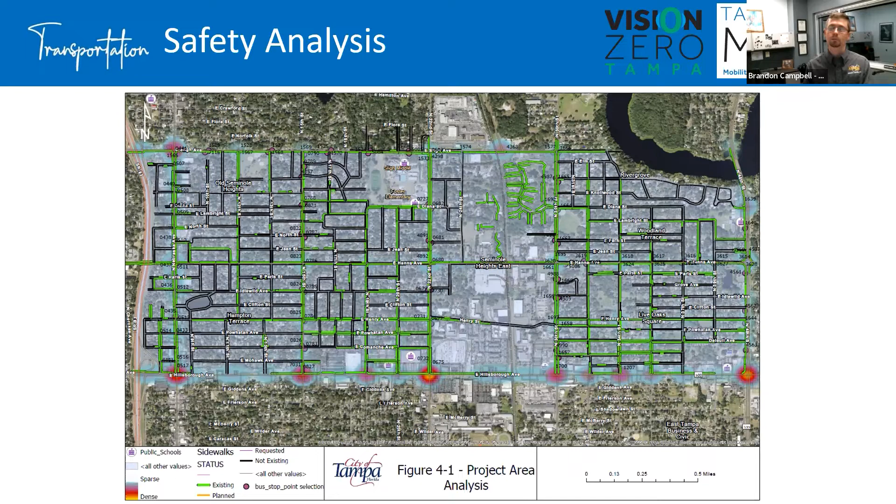You can also see on this slide an overlay of the sidewalk network. Everything that's green includes a sidewalk; everything that's black or gray does not. Part of the analysis process was to look and prioritize where we should fill in some of those gaps. There are a lot of gaps, and we have limited funding to address them, so we really need to figure out what the highest priorities should be.

Within that crash analysis, it's pretty typical for us to look at 5 years of crash data to categorize those by crash type and contributing circumstances. If there's some sort of identified pattern, then the recommendation is to take a step back and ask what this pattern can be attributed to.

Another step beyond the typical approach was that we included a road safety audit, which includes a multidisciplinary professional team that goes out and takes a look at the area, at the roadway with their own eyes, because sometimes the data-driven approach of just looking at where crashes have happened doesn't identify some of the potential hazards that we can see just by being out there on site.

As a result of the safety analysis, there were some recommended improvements to changing the geometry of crosswalks and curb radii, especially particularly on Hanna. Some multimodal accommodation, again centered as much on Hanna as anything. Some lighting improvements and some drainage improvements.

Those drainage improvements were identified partly as a result of just some observations with the road safety audit, and partly as a response to some of the wet condition crashes that we're seeing.

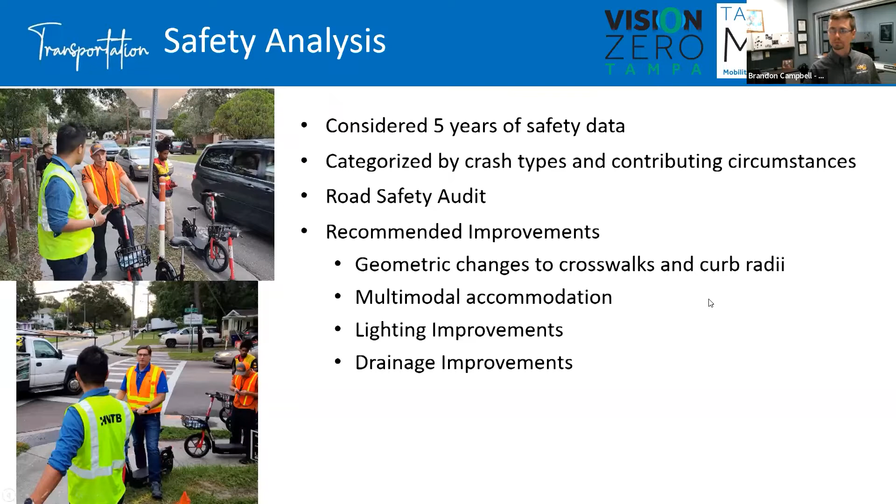The next step was the traffic calming analysis. I mentioned earlier that there were a couple of corridors that were spotlighted based on the community feedback we got, so we looked at traffic calming opportunities and possibilities, specifically looking at Hanna between 15th and 40th, looking at 24th Street between Hanna and Sligh, and looking at 23rd Street between Hanna and Idlewild.

So the recommendations based on the traffic calming analysis were, again, also related to the safety analysis from before: geometric modifications on Hanna, some speed feedback signs on both Hanna and 24th Street, and then eventually the possible addition of a sidewalk on 24th Street.

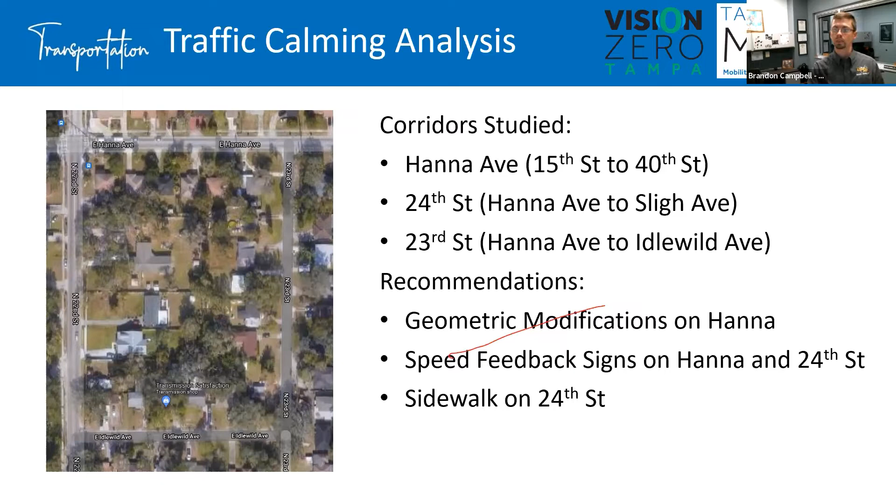If you're familiar with the corridor, it's pretty tight right of way, and there are some real design challenges to that, but taking a closer look and evaluating the possibility of putting a sidewalk on that street is one of the traffic calming strategies that we have been asked to consider.

And then last, the travel demand management. Again, we mentioned some of these things we anticipate doing, but did not want to incorporate them into the impact analyses because we wanted to take a conservative approach, and we don't want to take for granted something that is still a possibility or doesn't have a clear method of implementation just yet, but that we are pursuing.

So that includes coordinating with HART for transit access on Hanna. I know this is a topic that came up in previous community engagement, and for context, if you haven't been part of those conversations, there was previously a bus route that went on Hannah in front of the site. It was removed as part of their route reprioritization or route reduction for funding reasons.

We do not have direct control over HART's routing, but we do have a good relationship with them, and will continue to engage with them for possibly including a route that goes directly to the city center. But there are routes currently that go north-south on either side, on both 22nd and on 30th.

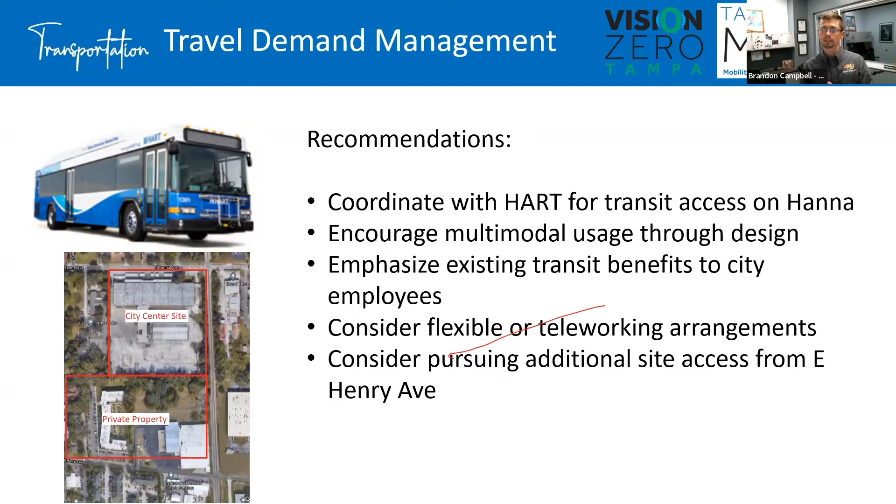So we were not comfortable committing to getting that done, again, as part of being conservative in our approach. It's not off the table by any means, but because we don't have direct site control, that might be a longer term process. And if the private property owners are not in favor of it, then obviously that is an obstacle to us.

So putting all this together, the recommendations that HNTB gave us were organized into near-term, intermediate-term, and long-term recommendations. There are timeframes on these: near-term is within 2 years, intermediate-term is within 5 years, long-term is beyond 5 years. I want to be clear that those timeframes are not commitments for us to do these things within these timeframes, but they're benchmarks for us to look at as we prioritize. Cal's going to get a little bit more into that when I turn it over to him.

That said, near-term recommendations include the potential signalization at Sligh and 30th. I mentioned earlier that it has a failing level of service with or without the development. We will need to take a step between now and the possible signalization to do a signal warrant analysis, just to make sure that it's the right solution for the right intersection. But it did seem to make a difference in the model.

School area improvements, including various signing and pavement marking modifications — I'll get into a little bit more of the specifics on that. Speed feedback signs on Diana Street, Hanna Avenue, and 24th Street — I mentioned a couple of those. Diana Street was part of the school recommendations, and then multimodal coordination with HART.

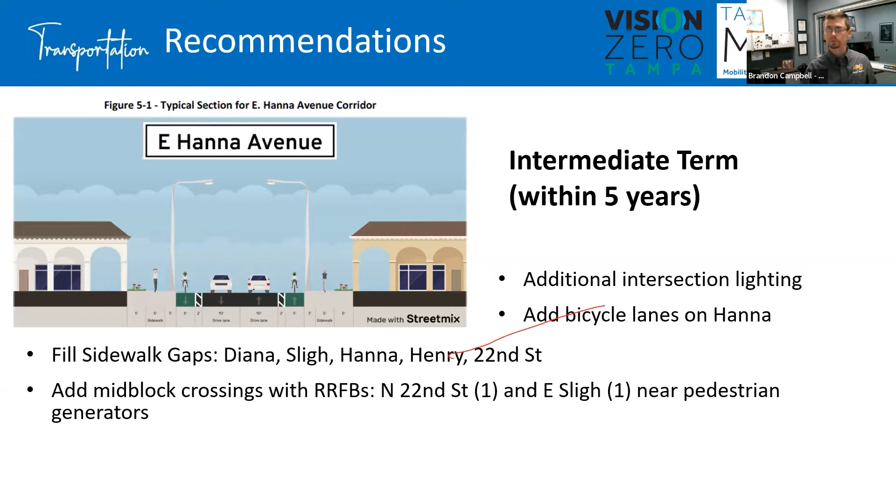I included this really as a reference point because we've had some feedback about what the cross-section of Hanna should look like and whether it should be expanded. There are several corridors across the city where we've taken a look at the cross sections that have in years past been expanded, specifically 4-lane sections, and really questioned, is this the right approach? We looked at the possibility of doing a road diet or a complete streets project to reduce that to 2 lanes, with either a continuous 2-way left turn lane or intermediate left turn lanes as needed.

We look at a lot of different guidance from different sources, one of which is the National Association of City Transportation Officials. I took a snippet from one of their complete streets guidance documents, just as a reference point, to say that's the sort of cross section we anticipate working for roads that are up to around 20 to even 25,000 ADT, which is average daily traffic. For comparison's sake, the current ADT on Hanna is between 6 and 8,000, depending on which block you're looking at. So we think that with the addition of a left turn lane into the site, maintaining 2 through lanes, 1 in each direction, is the right cross section for that facility.

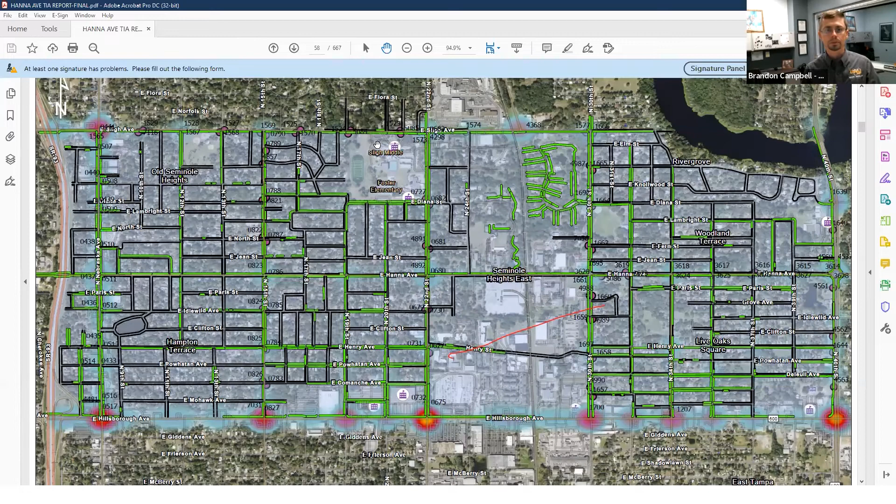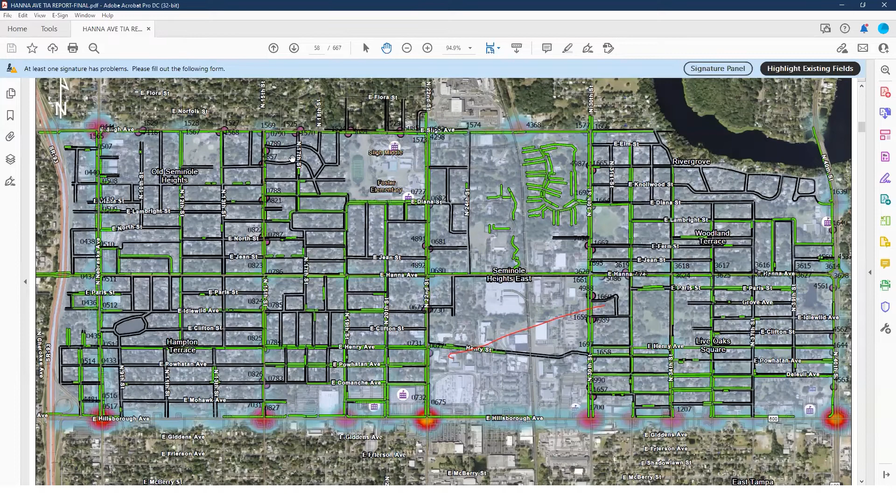The next question is from Robert Gatson of Seminole Heights East: did this study take into account that there is a 100+ unit apartment complex being built on 24th Street between Sligh and Hanna that will also be adding hundreds more daily trips to the immediate area? Looking at 24th Street between Sligh and Hanna, this area right here. Correct.

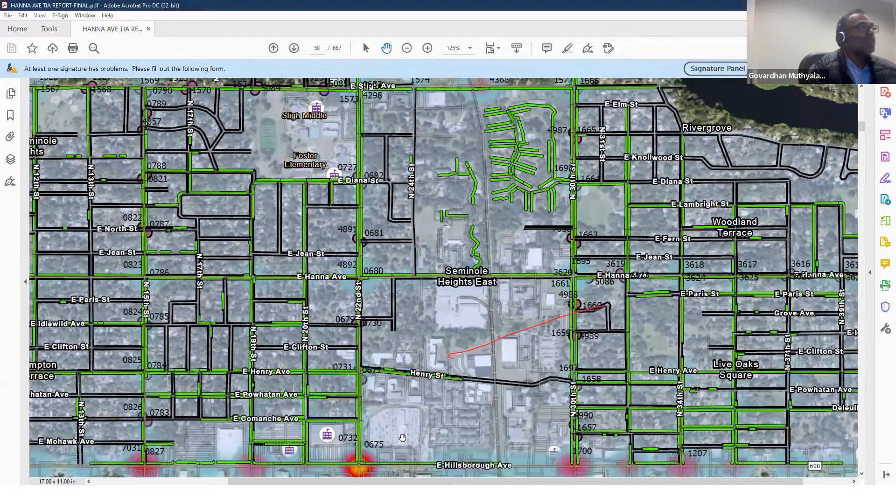Govardhan, was that identified? No, that wasn't specifically identified as part of the study. We incorporated the study from Hillsborough that we have information on, but what we did was, as part of the timeframes specified, Brandon, from 23 to 28 to 33 to 2033, we incorporated the growth rate as part of the study area. So part of it could be captured in that, but specifically the 100+ units has not been incorporated in the study—we did not have that information at the time of the study.

I have another question here. This comes from Miss Gadsden, and she has 3 questions, but the first one is most relevant to what we're talking about here. Let me rephrase this question.

Basically, what she wants to know is about the impacts along 34th Street and Hanna. There's a lot of traffic along those streets, and also a bottleneck of cars on 40th Street that sometimes intersects with traffic on Hanna and 34th Street. Can you talk about that?

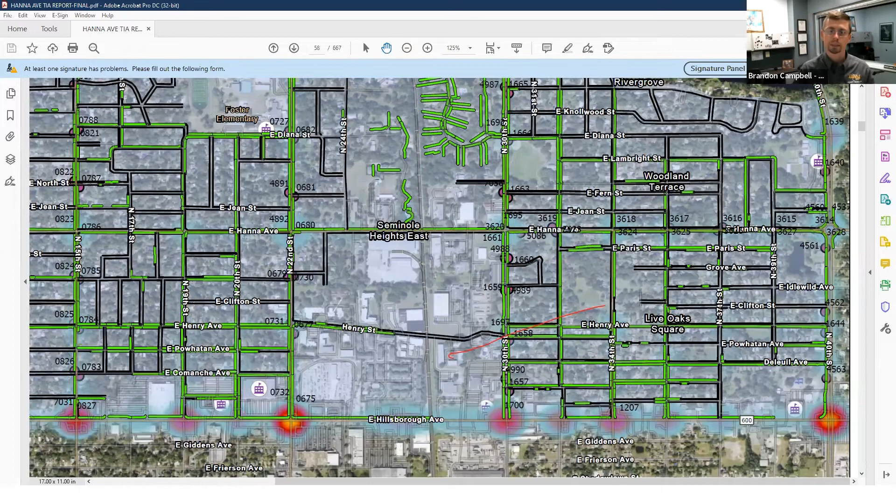So the assumptions about routing to the site in the AM peak centered more around, at least from Hillsborough, coming up 40th and taking the roundabout to go into Hanna, or coming up 30th and taking a left onto Hanna. Not so much on 34th. Let me see if I could pull that up.

Brandon, she's also very interested in the crash data as it relates to those streets, 34th Street in particular. Got it, the crash data is contained in Appendix F. Let me pull that up real quick. I know where that is.

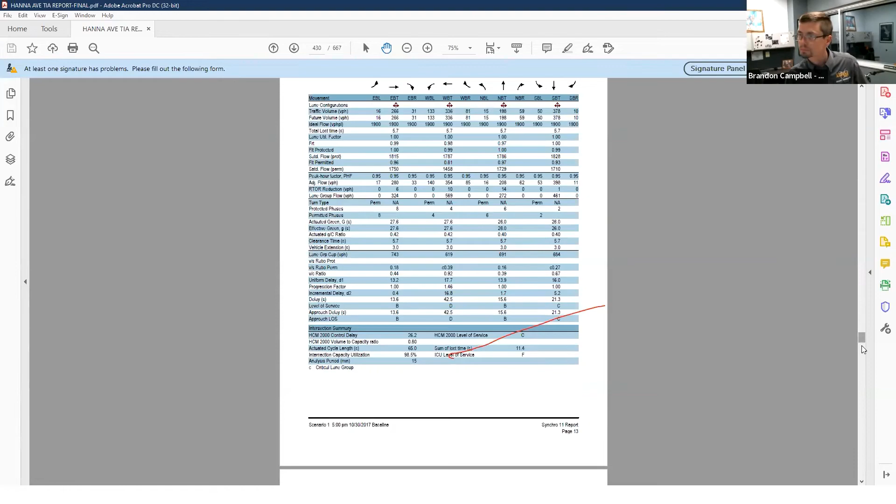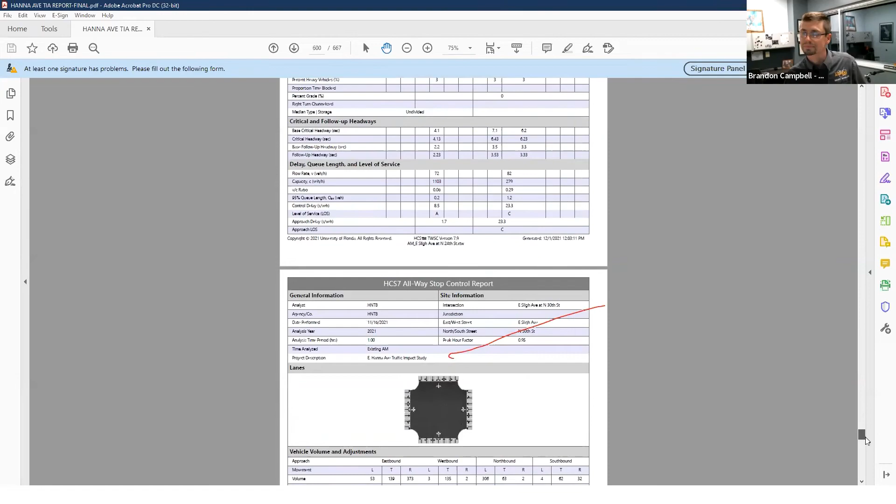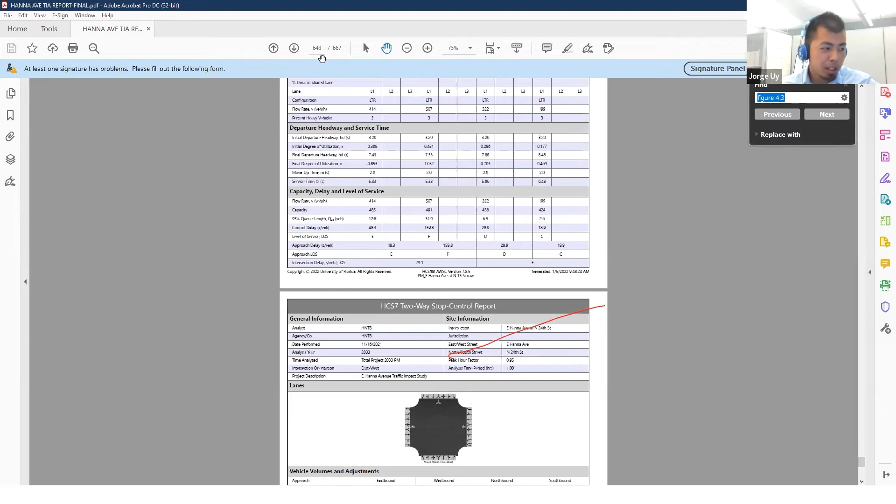Scrolling may not have been the best method. Sorry. Hey Brandon, it's PDF page 286. Thank you, appreciate that.

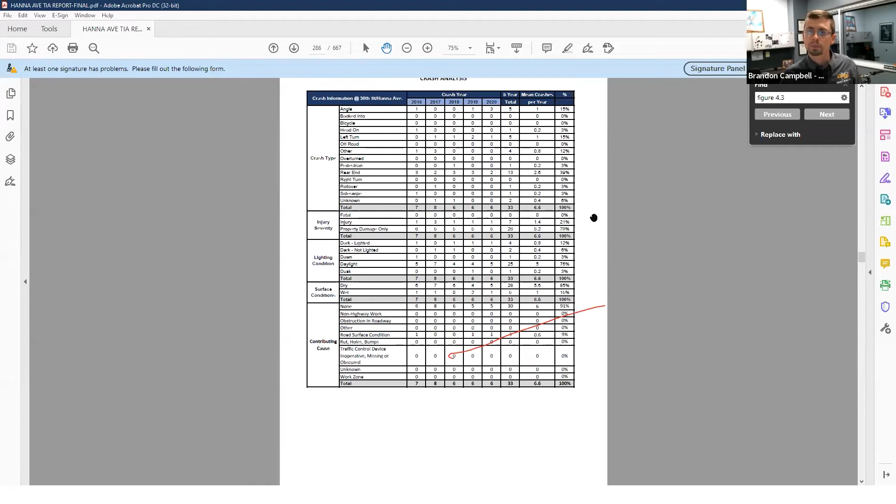So on 34th, we've got... that's Hanna Nebraska, Hanna 15th, Hanna 22nd, Hanna 24th. Were you asking specifically about Hanna and 34th? Correct, specifically about Hanna and 34th.

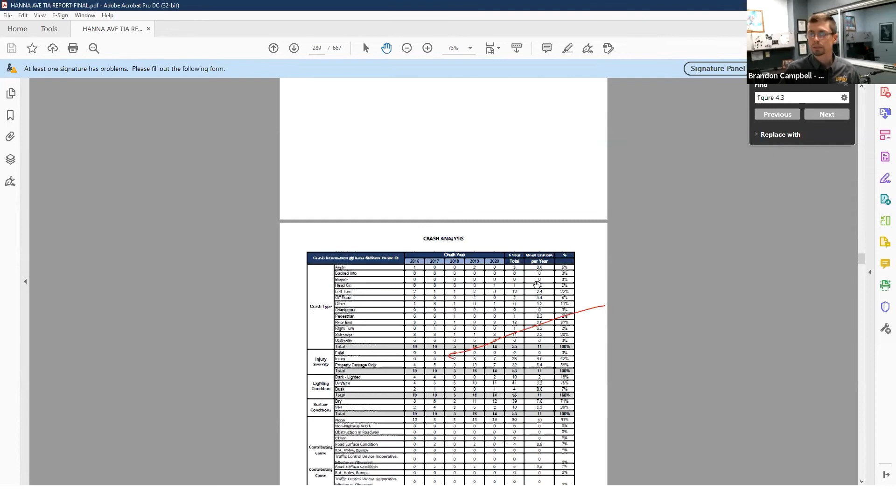Okay, it looks like we did not do a detailed look at Hanna and 34th. Would you be able to speak on that? Okay, go ahead, please.

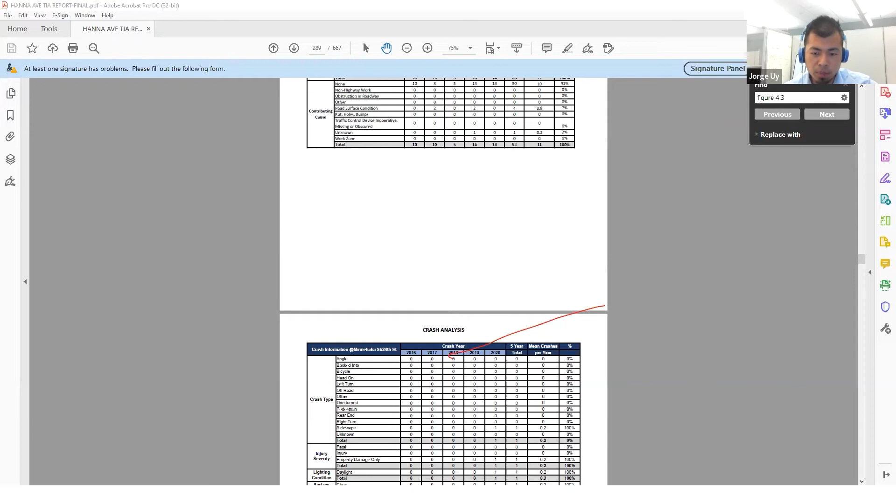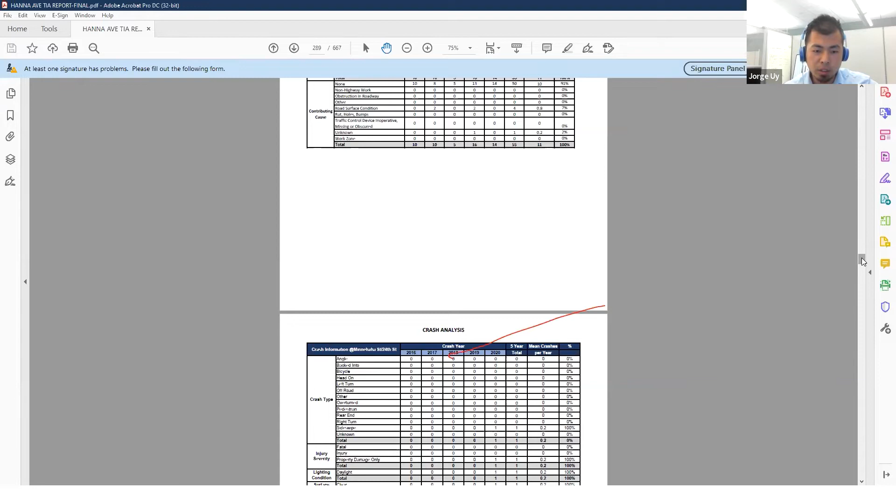Jorge: So when we were identifying intersections to summarize within the crash summary tables you're seeing in front of you, we took a high level overview. You can kind of see that within the heat maps we provided on the front end portion of the report that showed the frequency of crashes and the prominent locations. Hanna and 34th wasn't quite identified as a high crash location. Although we can certainly look at that intersection for additional details, for the time being, when we were performing the intersection analysis, at least Hanna and 34th was not one of those identified.

Thank you, Jorge. Our next question comes from Mr. Tim Keyports of Old Seminole Heights. This question is for Calvin Hardie: does a developer, in this case the city, have to complete a traffic study prior to the approval of a project?

Brandon, you might be able to answer that better than me. I don't do the traffic, I'm on the roadway side, the other type of engineer.

So it's dependent on the existing development and what trips that it's entitled to. Basically, a traffic study... actually, let me take a step back. The purpose of a traffic study for a new development, taking the city out of the equation as the developer, is generally to calculate a fee. So a site would have so many trips entitled based on the previous development, and additional trips generated by a new development would then be fed into the same sort of traffic impact analysis that we've done. And then the level of service would then be taken a look at.

And potential mitigation efforts, we'll say a signal at 30th and Sligh as an example, would be looked at, and the cost to implement those kinds of projects would be used as a baseline to calculate a fee to say, okay, we're using up this percentage of the capacity of the roadway with our site generated traffic. And it's generally a very small percentage of the usage of that roadway. It's a little bit of a complicated approach to doing things, but I think it's important to note that the end result of those kinds of traffic studies is not necessarily a roadway improvement implemented in the street.

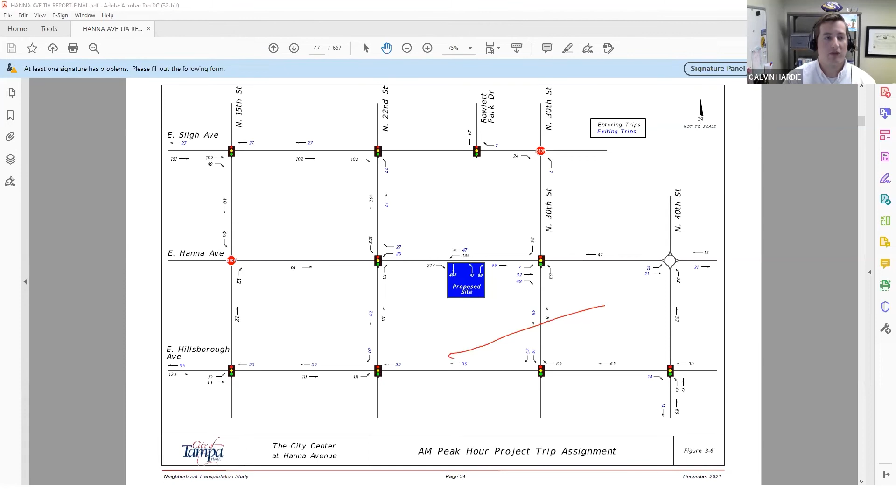With that Tampa Moves website, there are things with crash data in general that aren't recorded, near misses, smaller fender benders, things like that, that always have an opportunity for injury. So if you're seeing those on a daily basis but they're not recorded, that's stuff we want to hear from you. Please talk to us, it's a conversation. Let us know where you're seeing these issues, and please use the resources we have, because that's how we can capture those.

Brandon, if you could put the Tampa Moves information on screen again. Now I'll move on to the question from Ms. Gatson. Her question starts with a statement about TECO poles: they appear to be along Hanna Avenue and not in the streets south of Hanna. Are they a regional point for heavy-duty electricity in the area? She's asking why were they constructed along Hanna Avenue and not Hillsborough Avenue, which is already zoned commercial. It's really a question for TECO, but I think what she's getting at is whether those poles, being unsightly, also pose some risk for pedestrians if we want more sidewalks in the area.

I can answer that one too. The TECO poles you're referring to, the smaller poles are distribution, the larger poles are transmission. Unfortunately, with overhead lines, the larger poles are basically the highways and the smaller poles are the little local streets. They get service to the house, but their placement isn't restricted, it's based on where TECO needs their distribution and transmission lines to be.